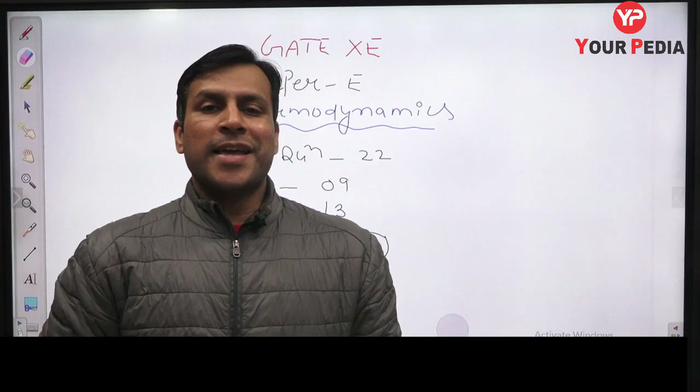So guys, as you all know, we are covering all previous year XE papers. Until now, we have covered all papers up to 2015. In today's session, I am going to cover the XE thermodynamics paper from the year 2014.

As we go to previous years, like from 2021 to 2014, the difficulty level slightly decreases because nowadays they are asking very difficult questions. So from this paper you cannot predict exactly which type of direct question you will get in the final examination 2022. The chances are very less because nowadays in XE, in the mathematics technical part, they are asking a very good level of questions, because they have increased the difficulty of the XE paper also. Why? Because lots of students nowadays are appearing for GATE XE, so you need to prepare accordingly.

So let's start. This paper is also very important because when covering all previous years, we need to get the idea of what different types of basic questions can be asked. It is not that they will never ask these types of questions - they are going to ask, but not all. Suppose 30, 40, 50% of the paper, maybe something like that, 50% maybe slightly difficult. In this paper most questions you will find on the conventional, simple line, but some more difficult questions also you need to practice.

Chaliye, let me put question number 1 in front of you. This is question number 1 for today's session from the year 2014, question number 155 in this series. In this first question he is asking you: what is entropy?

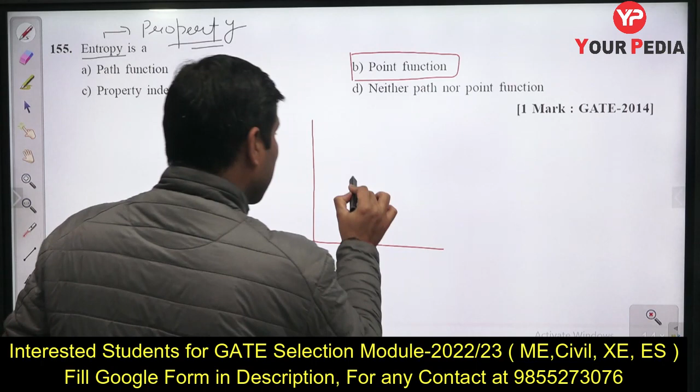So it is a kind of extensive property, but it is a property of a system, and all properties are point functions. All properties do not depend on the path. So entropy also - for any particular process, suppose this is point 1 and this is point 2 - if you want to write the entropy change, whether you go via path A or via path B, S(1 to 2) via path A equals S(1 to 2) via path B. Both are the same because entropy is a point function, not a path function.

All properties are point functions, but heat and work are not properties and they are also not point functions - they are path functions. So for this question the right answer is: point function. Chaliye, let us move to the next question.

Question number 156 in this particular series. There is a small container which has a gas at high pressure. It is placed in an evacuated space. So there is a container having some gas at high pressure, placed in the evacuated space. If the container is punctured, what is the work done?

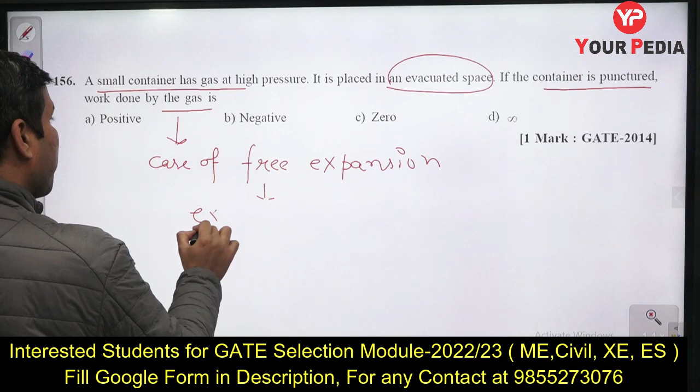Guys, it is a kind of free expansion - a case of free expansion. The gas is expanding, the gas is going to expand against vacuum. It is the expansion against vacuum. In this expansion against vacuum, the work is zero. There is no work transfer. W equal to 0.

So option C is the right answer for this question. Let us now move to question number 157.

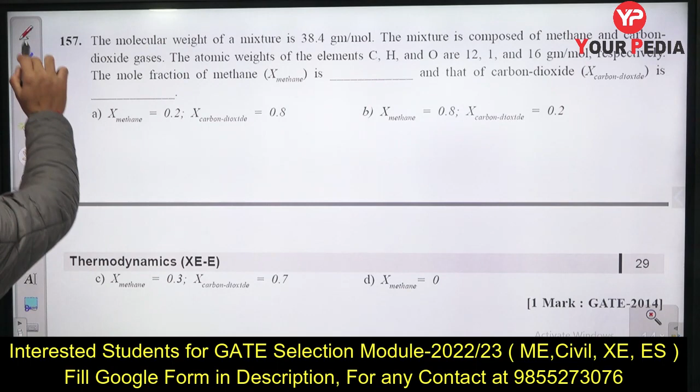A molecular weight of a mixture is 38.4 gram per mole - this is the molecular weight of the mixture. Suppose Me is this equivalent molecular weight given to us as 38.4. The mixture is composed of methane and carbon dioxide. The atomic weights of carbon, hydrogen, and oxygen are given to us respectively. He is asking the mole fraction of methane and mole fraction of carbon dioxide. Both are simple, direct questions, 1 mark each, and easily you can answer.

Guys, if you are having a mixture of two substances, here methane and carbon dioxide, a homogeneous mixture, you can write the equivalent molecular weight as 38.4. You can frame a simple equation for Me, the equivalent molecular weight.

Suppose you are having a mixture of pure substances. For any such mixture, the equivalent molecular weight equals the mole fraction, which you can write as N1 by N total, number of moles of methane divided by N total, and similarly for carbon dioxide divided by N total. So from this you can frame the equation: 38.4 equals this mole fraction expression.

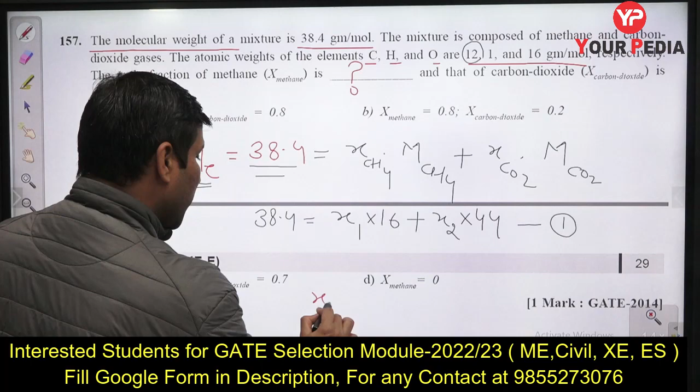We can write one more equation: mole fraction of methane plus mole fraction of carbon dioxide equals 1, because they constitute the entire mixture. So N1 by N total plus N2 by N total, taking LCM gives N1 plus N2 equals N total. So mole fraction of 1 plus mole fraction of 2 equals 1. This is another equation. Two unknowns, two equations, and you can easily solve using this.

From this, if I replace x1 equal to 1 minus x2, and put this value here: 38.4 equals (1 minus x2) into 16 plus 44 x2. Let me further solve this: 38.4 equals 16 minus 16 x2 plus 44 x2. So you will get 38.4 minus 16 equals 28 x2, subtracting this from that.

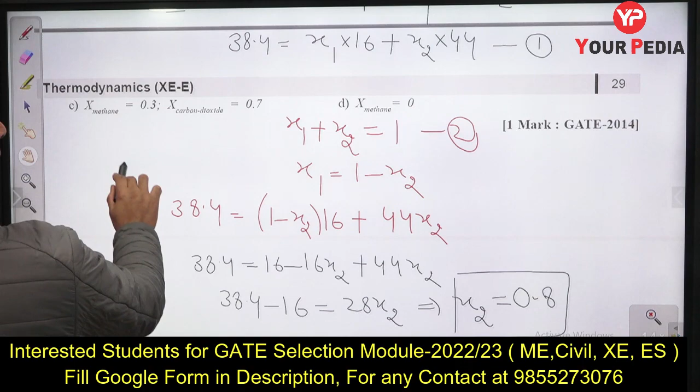And from this you will easily get x2, the mole fraction for carbon dioxide. So 38.4 minus 16 divided by 28, you will get 0.8. So 0.8 is the mole fraction for carbon dioxide, and for methane you will get 0.2, because methane is 1 minus this. So x1 equals 1 minus x2, which comes out to 0.2.

So option A will be our right answer. For methane the mole fraction is 0.2, and for carbon dioxide the mole fraction is 0.8. You can check your answer. Let me check mine too, so we can match all the answers. Yes, 0.2, 0.8 - option A is the right answer for this question.

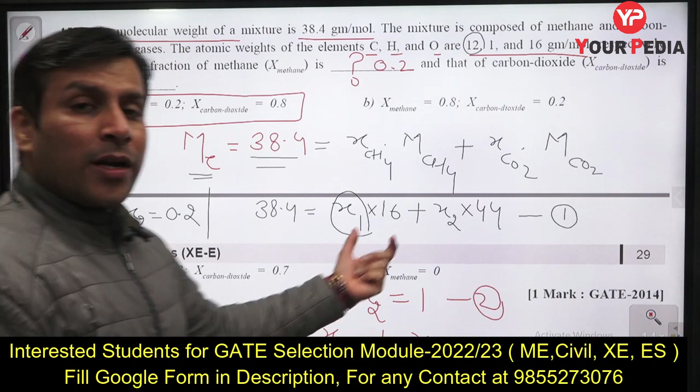I hope this is very clear to all of you. It's a very simple question - if you are clear with this formula, then direct simplification is all you need, and you will get the answer. Let us now move to the next question, guys, question number 158 in this series.

A system undergoes a change from state 1 to 2. During the process, the change in internal energy occurs - this is state 1, this is state 2, and during that state change, the change in internal energy is delta U, from 1 to 2.

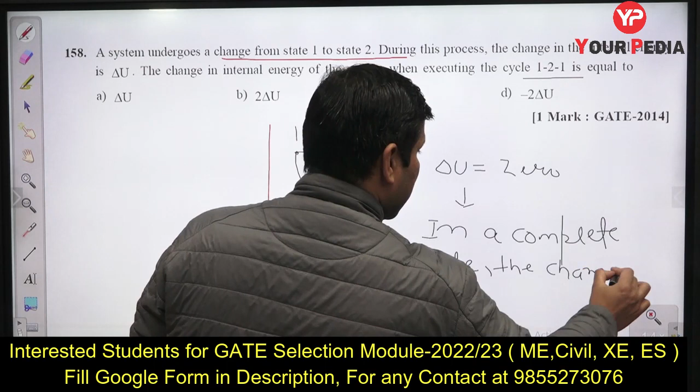So the change in internal energy of the system when executing the cycle 1-2-1 - if you execute a complete cycle like this, the change in internal energy will become 0. Why? Because in a complete cycle, the change in any property is 0 - whether it is internal energy, entropy, temperature, pressure, volume, any property is 0. So we can write option C as the right answer.

Option C will be our right answer for this question. Let us now move to the next question, guys, question number 159.

Which of the following plots represent a line joining two states with the same dew point temperature on the psychrometric chart? On the psychrometric chart, horizontal lines represent the dew point temperature.

Suppose this is state 1 and this is state 2. If you extend a horizontal line here so that it meets this point, that temperature gives us the DPT, dew point temperature. This is our saturation line where relative humidity is 100%. So for any different states on the same horizontal line, they represent the same DPT, because on a horizontal line DPT is constant. These are all DPT lines.

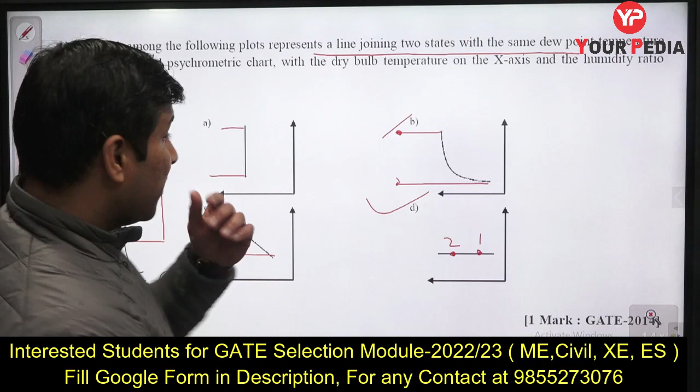So the option that matches is option D, because there if you take two states, you will have the same DPT at both points. But in other options, if you extend the lines, you get different DPT values, because only a horizontal line gives the same DPT. So only D is the right answer.

Let us now move to the next question, question number 160.

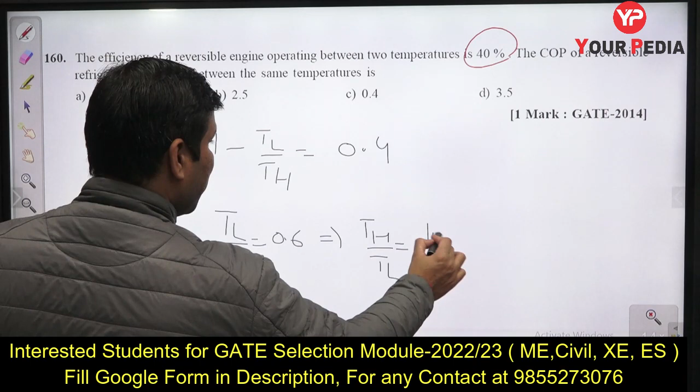The efficiency of a reversible engine operating between two temperatures is given. A reversible engine's efficiency is 1 minus T lower by T higher. This is given as 40%, meaning 0.4. So T lower by T higher equals 0.6, and from this T higher by T lower equals 1 by 0.6, which is 10 by 6.

Now he is asking for the COP of the reversible refrigerator. COP of a reversible refrigerator is T lower by T higher minus T lower, which can be written as 1 by (T higher by T lower minus 1). Putting the value, 1 by (10 by 6 minus 1), solving this gives 6 by 4, which equals 1.5.

So option A, 1.5, is the right answer for this question. A very simple, direct question, and I hope this is clear to all of you.

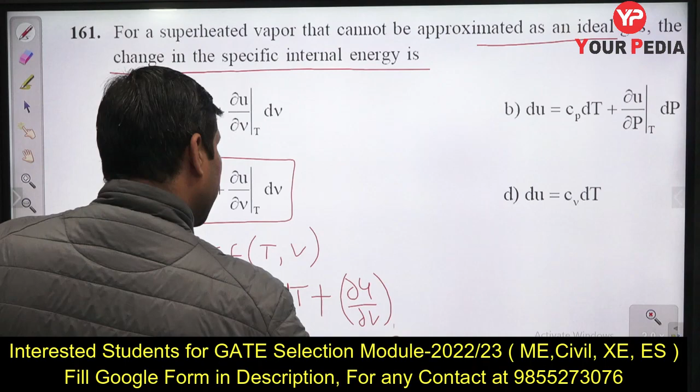Directly, you need to remember option C is the right answer. But if you want to derive it, write internal energy as a function of temperature and volume. Since this is a property, du equals (del u by del T at constant v) dT plus (del u by del v at constant T) dv.

This first quantity is nothing but Cv. So du can be written as Cv dT plus (del u by del v at constant T) dv. This is how you write the change in internal energy for a real gas.

This particular quantity, del u by del v at constant T, will be zero for an ideal gas, because for an ideal gas the change in internal energy is independent of volume.

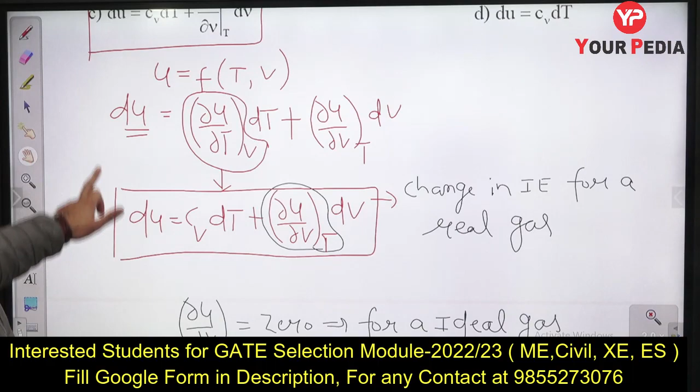Okay, so if it is independent of volume, this term will be 0 for an ideal gas, but for a real gas this term is going to exist. So you can write, for a real gas, du equal to CVdT plus del u by del v at constant T dV. You need to directly remember this relationship.

Similarly, you can remember enthalpy also, change in enthalpy for a real gas. Change in enthalpy for an ideal gas is CPdT, change in internal energy for an ideal gas is CVdT, but this is how you write change in internal energy for a real gas. Same with enthalpy you can write. Earlier also we discussed all these things.

Let us now move to the next question. The minimum and maximum volumes in an air standard Otto cycle.

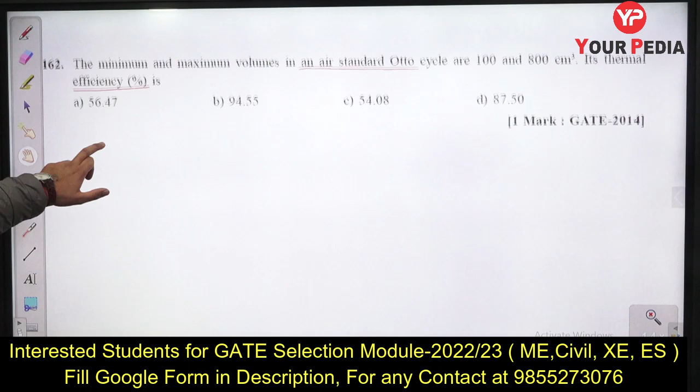There is an air standard Otto cycle, the minimum and maximum volume given are 100 and 800 centimeter cube. So V minimum means this is clearance volume Vc, given to us as 100. V maximum means this is the total volume, given to us as 800.

So compression ratio is nothing but total volume divided by clearance volume. So 800 divided by 100, this is the compression ratio. 8 is the compression ratio for the given case. So indirectly he is giving you the compression ratio.

He is asking you the thermal efficiency of the Otto cycle. This is nothing but 1 minus 1 by r to the power gamma minus 1. So here, 1 minus 1 by 8 to the power gamma, gamma is 1.4 for air, because he is asking air standard Otto cycle. So for air, gamma equal to 1.4.

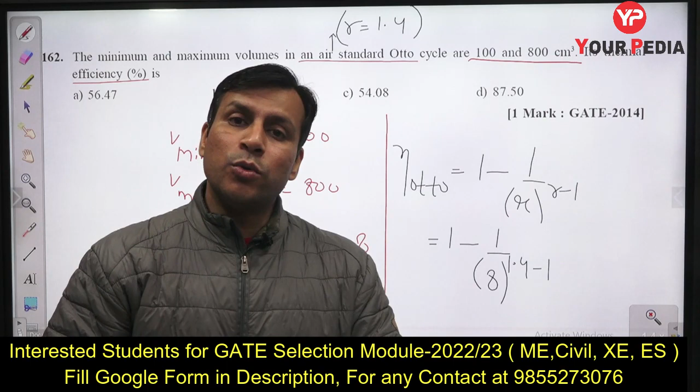For monoatomic gases, gamma equal to 1.67. For exhaust gases, gamma equal to 1.33. So if you solve this, guys, you will directly get the efficiency. Let me solve it for you: 8 power 0.4, 1 divided by this, 1 minus this, you will get efficiency 56.47.

Option A is the right answer for this. You will get efficiency 0.5647 or 56.47%. Both simple, direct question. I hope this is very clear to all of you.

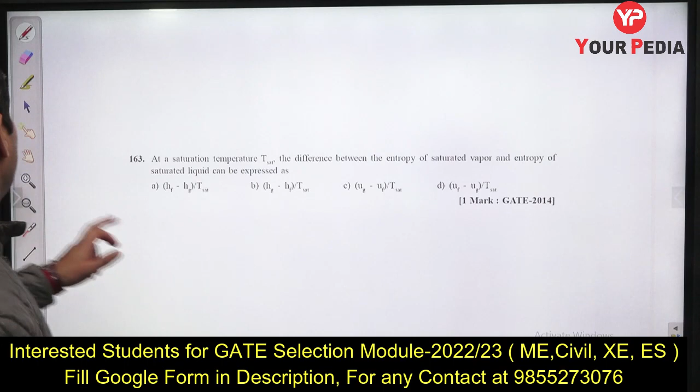Let us now move to next question, guys. Question number 163. I am solving these very directly. If you want to practice, you can pause the video before I answer. If you are unable to answer, you can watch the detailed solution part.

So next question: at the standard saturation temperature, T saturation, the difference in entropy between saturated vapor and liquid is this. How can you express the change in entropy between the vapor? Suppose this is T saturation, this is entropy of the saturated vapor Sg, this is entropy of the saturated liquid Sf, and he is asking how we can write Sg minus Sf.

Sg minus Sf is nothing but Hfg by T saturation. You know ds equal to dq by T. So for a phase change process, ds equal to Sg minus Sf and heat transfer equal to Hg minus Hf, where T is the temperature of the phase change, which is T saturation. So you can write Sg minus Sf as Hg minus Hf by T saturation.

So option B is the right answer: Hg minus Hf divided by T saturation. So don't rush and write it wrong as Hf minus Hg by T saturation, that will be incorrect. He is asking the entropy difference between saturated vapor and saturated liquid, which is Hg minus Hf divided by T saturation.

Let us now move to the next question. Okay, now we are moving to the 2 marks question. This is the first 2 marks question in front of us.

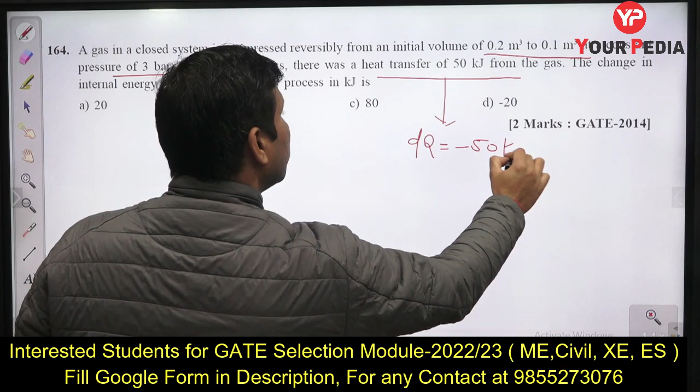Using first law of thermodynamics for a closed system, we can write here dq equal to du plus dw.

So what is dq guys? Dq here it is minus 50, du we want to find out, dw is also minus negative. Why? Because here you are compressing the gas, means the work is done on the system at a constant pressure.

You are compressing a gas at a constant pressure. So pressure is constant. So in a closed system, if pressure is constant, you can write work equal to P into V2 minus V1, final volume minus initial volume. Automatically you will get the negative work. If you write it as V final which is 0.1, V initial is 0.2, you will get negative work. But already when I placed here negative sign, so inside you can write it as initial volume minus final volume, something like this.

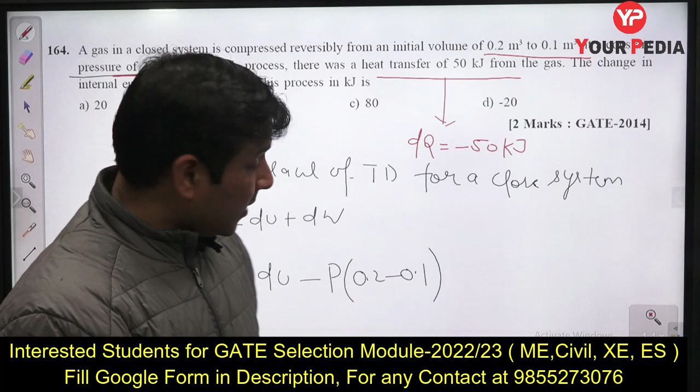But if you are interested to write it as dW only, then you can write it as something like this, but then inside you need to write the final volume minus initial volume, then automatically you will get this in negative. Okay, so let us solve this.

So du minus the pressure is 3 bar, so you can write it as 300 kilopascal, this is 0.1. So solving this, you will get minus 50 equal to du minus 30 kilojoule. Solving this further, you will get du equal to minus 50 plus 30, you will get minus 20 kilojoule. So internal energy is going to decrease by 20 kilojoule.

Internal energy is going to decrease by minus 20 kilojoule, means option D is the right answer for this question. Let us now move to next question, question number 165.

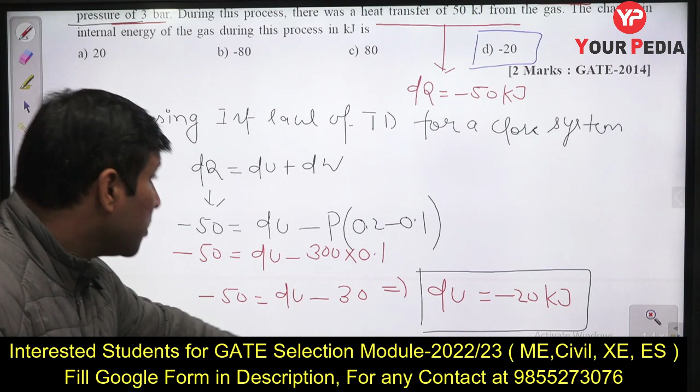165 in this series, in a closed rigid vessel, the air is initially at a pressure of this. This is the initial pressure, guys. This is the initial volume and this is the initial temperature. A stirrer is supplied this much of work.

So work transfer in this process, W equal to minus 100 kilojoule, because work is done on the system. So gas inside this chamber, this is our system, guys. The gas inside this is our system. Work is done on the system, that's why I am writing it as minus.

While 20 kilojoule of heat is lost, again this is heat going out, so the heat transfer is equal to minus 20 kilojoule. You can write it as Q only. So heat transfer Q equal to minus 20 kilojoule. He's asking you the final temperature.

So guys, again very similar kind of question. dq equal to du plus dw. How much is the heat transfer? Minus 20. How much is this? We want to find out. What is the work transfer? This is minus 100. Okay, so du will be 80 kilojoule.

This is a closed container, guys, closed rigid container. So for an ideal gas in a closed rigid container, du, change in internal energy for an ideal gas, because here he mentioned air is inside the chamber in this container, and we can consider air as an ideal gas.

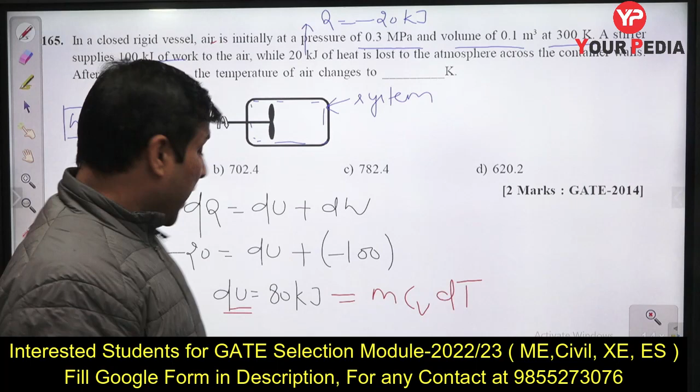So for air as an ideal gas, we can write du equal to mCv dt. dt we want to find out, initial temperature we know, Cv also we know for the air, which is 0.718. Mass we don't know, and mass you are going to get from this inputs. So PV, ideal gas equation, PV equal to mRT.

So the mass inside this equal to initial pressure which is 0.3 megapascal. So 0.3 into 10 to the power 3 into volume. Volume is this 0.1, which is fixed. 0.1 divided by R. So for air, R is 0.287 into the initial temperature, which is 300.

So you will get mass inside this chamber very easily, after simplification. So let me write it here: 0.3 multiply by 1000 multiply by 0.1 divided by 0.287 divided by 300. So you will get mass 0.3484 kg.

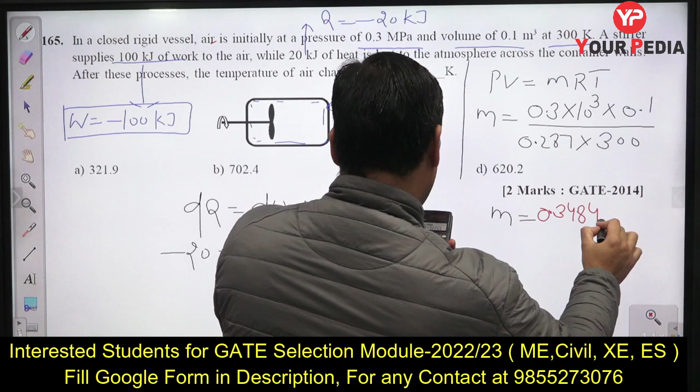34843 kg, okay, and this mass if you put it here, this is the mass. 0.34843, Cv is 0.718, dt is T final.

We want to find out T initial is 300. Easily after solving you will get this final temperature. So let me solve it for you. Multiply by 0.718 and this term 80 you can divide by this, and then T final will be plus 300. So you will get this final temperature close to 619.77 Kelvin, which is very close to 620 Kelvin.

So you can go with this answer, option D as the right answer. 620.2, this is the final temperature.

Let us see, he is asking in Kelvin. Let me write it as Kelvin only, because this is the temperature you are going to get in Kelvin only. So this is the temperature in Kelvin, because this 300 is in Kelvin, so this final temperature will also be in Kelvin. So this is the answer, close to T final is close to 620 Kelvin, not in degree Celsius.

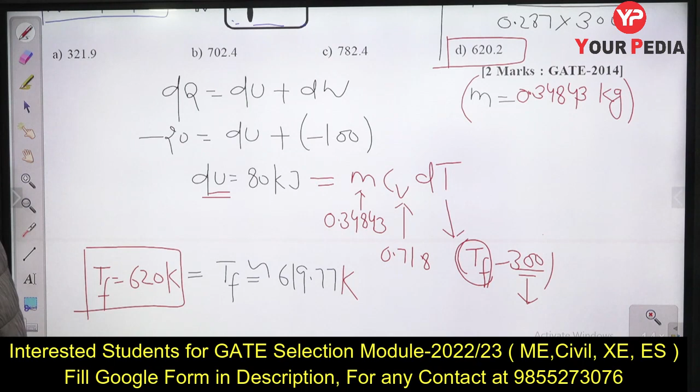So T final temperature is 620 Kelvin, not degree Celsius. He asked you in degree Kelvin only. But if you want to find out in degree Celsius, then you need to subtract 273 from this, then you will get the answer in degree Celsius also. So option D, this is the right answer for this question. I hope this is very clear to all. Please check and you can match your answer also.

Let us now move to question number 166 in this series.

There is a reservoir, reversible heat engine E, which is operating between three thermal energy reservoirs, with the temperatures as shown in the figure: reservoir 1, reservoir 2, and reservoir T3. From reservoir 1 and reservoir 2 it is taking some heat, and to reservoir 3 it is rejecting. It is given to us Q1 equal to Q2, and he is asking you the thermal efficiency of the engine.

Thermal efficiency of the engine. So you know thermal efficiency of any heat engine is nothing but W net divided by heat supplied. So you can write it as Q net divided by heat supplied, or as 1 minus Q rejection by heat supplied. So what is the rejection in this case?

In this case, what is the rejection? Rejection is Q3. And what is heat supplied? Heat supplied is Q1 plus Q2. But as it is given to us, both Q1 and Q2 are same, so I can write this efficiency as 1 minus Q3 by 2Q1, because Q1 is equal to Q2.

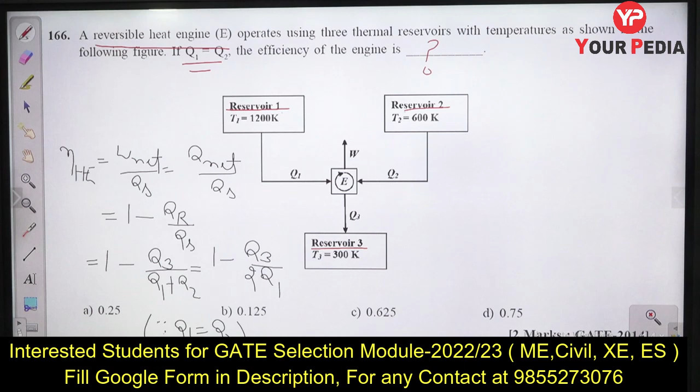Okay, so now you need to find out this ratio Q3 by Q1. If you are able to find out this ratio, you will easily be able to solve this problem. And from where will you get this? Because it is very clearly given to us that it is a reversible heat engine, so for any reversible heat engine, cyclic integration of dQ by T is equal to 0. Using Clausius inequality, if you apply cyclic integration of the thermodynamic temperature scale, Q by T, that is equal to 0 for any reversible cycle.

So here, because this is heat addition, you can write it as Q1 by T1, this is positive, Q2 by T2, this is also positive, minus Q3 by T3, this is negative. Why? Because heat added to the system is positive, heat rejected by the system is negative. So further you can write it as Q1 into 1 by T1 plus 1 by T2, since Q1 equal to Q2, these two are same, so I can easily take Q1 common.

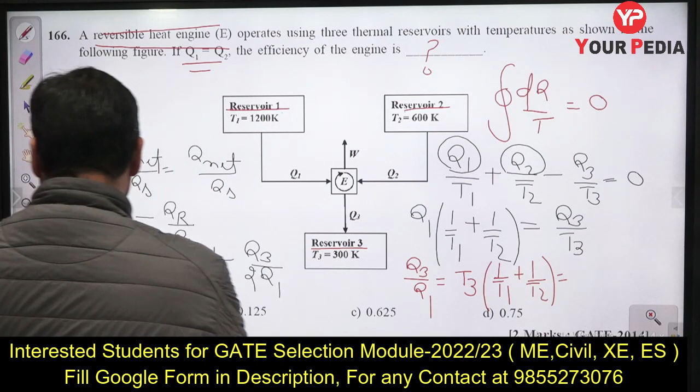This is equal to Q3 by T3. Solving this further, you will get Q3 by Q1 equal to T3 into 1 by T1 plus 1 by T2. Let me put in all the values so that we get this answer. T3 is 300 Kelvin, into 1 by T1 is 1200 Kelvin plus T2 is 600 Kelvin. Okay, let me simplify this.

Q3 by Q1, this is equal to 300. From this I can take 600 common, so inside you get 1 by 2 plus 1, so this is 300 by 600 into 3 by 2. If you further solve, you get 3 by 4. So this term, Q3 by Q1, you are getting 3 by 4.

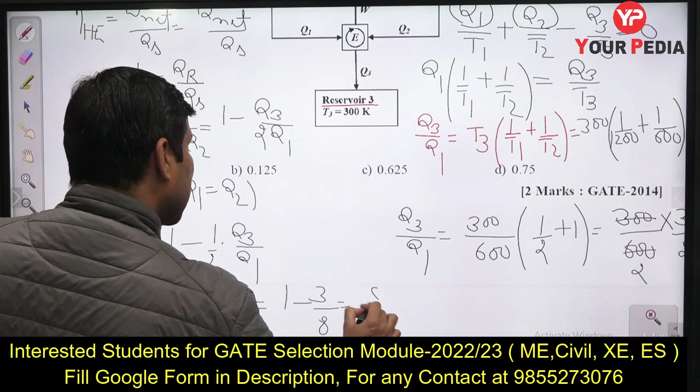So now if you will put this value here, efficiency of heat engine equals 1 minus 1 by 2 into Q3 by Q1, and we got the answer for Q3 by Q1, which is nothing but 3 by 4. So this is 1 minus 3 by 8, so the efficiency is 5 by 8, which is nothing but what?

If you divide this, you will get 0.625. So 62.5% or 0.625 is the answer for this question. So if you will solve, you will get option C as the right answer.

Okay, it's a very simple question, a little calculation needed, but the concept is very direct and simple. So he asked you the efficiency of a heat engine. We know the basic expression for the efficiency of a heat engine. So in this case we used the efficiency of a heat engine formula, and solving this we got the answer for the efficiency. I hope this is very clear to all of you guys.

Let us now move to the next question, guys. Question number 167.

There is a metal block of mass 25 kg at 300 Kelvin. So we have a metal block - this metal block is 25 kg at 300 Kelvin.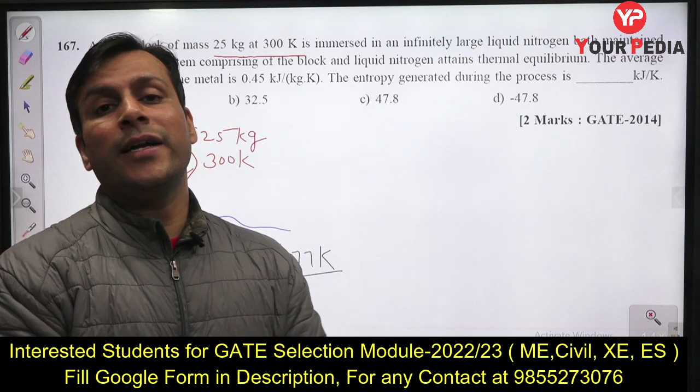This is immersed in an infinitely large nitrogen bath. So there is an infinitely large nitrogen bath, at a temperature of 77 Kelvin, because it is an infinitely large reservoir, so it is at a constant temperature. Reservoir temperature is not going to change because it has infinite thermal capacity. So its temperature is not going to change even if you immerse this metal block in it, which is at a high temperature.

So the system comprising of block and nitrogen attains thermal equilibrium. When you immerse this block in the bath, they are going to attain some final temperature. The average specific heat of the metal is given. He is asking you the entropy generation - what is the entropy generation in this case? Very typical question - earlier we solved these type of questions too.

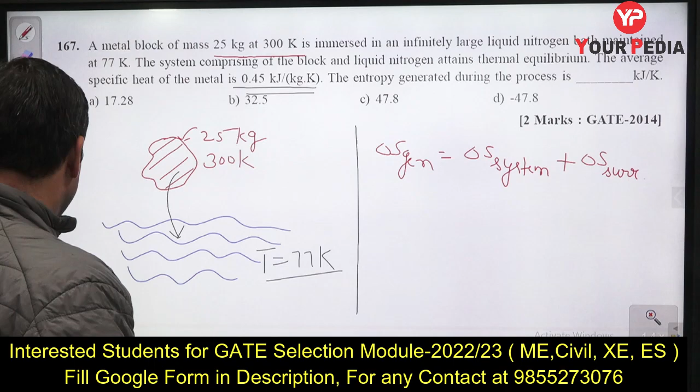So guys, entropy generation is nothing but entropy change of system plus surrounding. What is mentioned is that the system comprises of block and liquid nitrogen - both are being called the system. So in that case, if they are only interacting via heat, then the entropy change of the surrounding will be zero. So entropy change of system means entropy change for the block plus entropy change for the reservoir, meaning this tank.

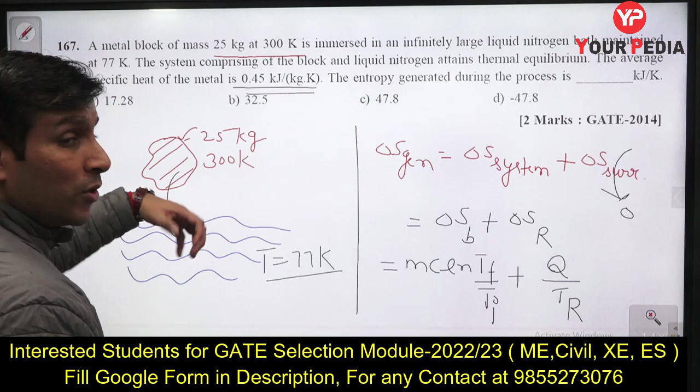So for the block, the entropy change will be MC ln(T final/T initial). For the reservoir, it will be heat transfer, heat added, divided by the temperature of the reservoir. Because you are adding heat here, so its entropy is also going to increase. For a thermal energy reservoir acting as a sink, entropy is heat addition into the sink divided by sink temperature. For a source, the supplier of energy, entropy is going to decrease, but here you are supplying energy, so entropy is going to increase - Q by T, Q will be positive here.

Okay, so if you will solve this: MC ln. What is the mass of this block? It's given to us as 25. The specific heat C is given to us as 0.45 kilojoule per kg.

And ln of T final - what is the final temperature, guys? For the metal block, final temperature will be 77, because this is a thermal energy reservoir, so finally this metal block is going to attain this temperature only. So this is T final. What is the initial temperature? It is 300.

Plus, what is heat transfer, guys? Heat transfer will be MC dt. So I can write heat transfer Q equal to MC dt. How much heat do you get? 25 into specific heat 0.45, into change in temperature which is 300 minus 77, you will get heat added. So let me solve it here: 25 multiply by 0.45 multiply by 300 minus 77, you will get 2508.75 kilojoule. This is the amount of heat you are adding.

So if you take this value, 2508.75 divided by temperature of the reservoir, which is 77. Let me solve it for you so you get the exact answer: ln of 77 divided by 300, multiply by 0.45 multiply by 25.

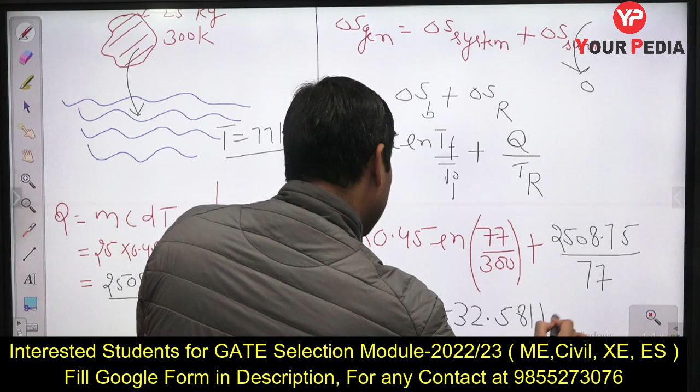So from this you can write 2508.75 divided by 77, you will get 32.58116. If I subtract minus 15.299 from this, you will get entropy generation in this process: 17.282 kilojoule per Kelvin. Entropy generation will always be positive for any irreversible process. For this also we are getting the entropy change positive, which is 17.282.

So let us now match the options. Yes, option A is exactly matching, so this is the right answer for this question. This is a very simple direct question, and guys you need to be very much familiar, very comfortable solving these type of questions, because these are very direct simple questions. Okay, I hope this is very clear.

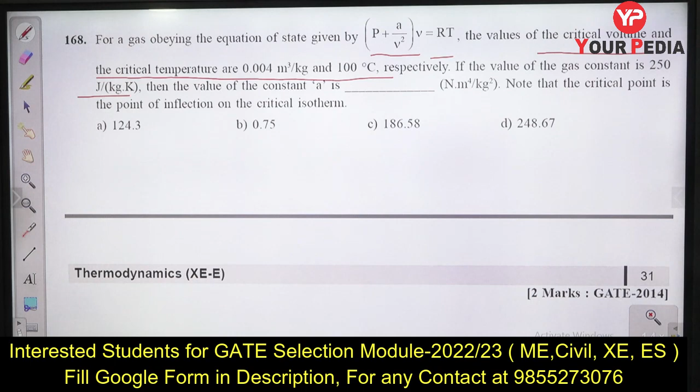Let us now move to next question, question number 168. So for a gas obeying the equation P plus A by V square into V equal to RT, the values of the critical volume and the critical temperature are given. The value of the gas constant is also given to us, 250 joule per kg Kelvin. Then he is asking you the value of the constant A.

Guys, you know these kind of equations we use for the real gas equation. For ideal gas we use PV equal to RT, this is the ideal gas equation. So where V is the specific volume, I am writing this V as the specific volume. And you know guys, this kind of equation, P plus A by V square into V minus B equal to RT, this is known as van der Waals equation, van der Waals equation for real gas.

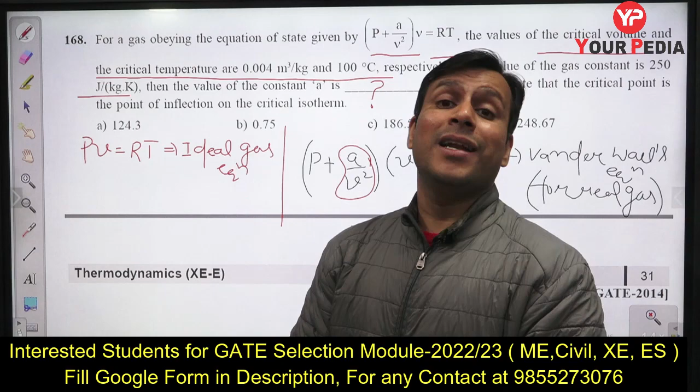In this equation, this term A is introduced to take into consideration the force of attraction between the gas molecules, and this term B is introduced to take into consideration the volume of the gas molecules, because for ideal gas generally we neglect the intermolecular force of attraction between the gas molecules. We consider there is no such intermolecular force of attraction between the molecules of an ideal gas.

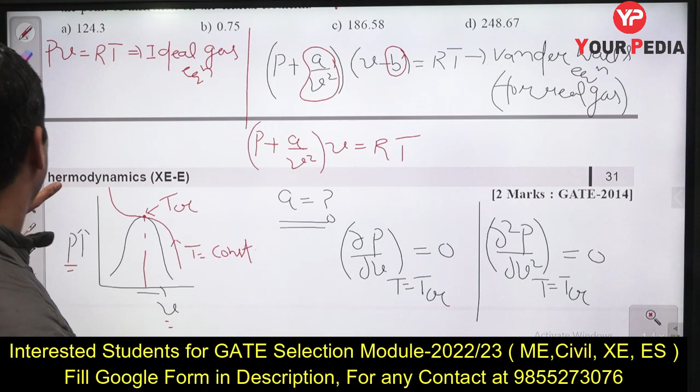So let me solve it for you guys. If I simplify this equation: PV plus A by V equal to RT. Further simplification, you will get PV equal to RT minus A by V, or solving this you will get P equal to RT by V minus A by V square.

Now what you need to do is simply differentiate this. You need to differentiate it, so yes, you can write it as del P by del V into RT.

This is actually V to the power -1. So -1 into V to the power -2, you will get minus RT by V square.

Here also, because this is minus, if you take it upside, you will get -2. So minus, if you take it here, you will get 2A, -2 minus 1 gives -3. So this will come out. Very simple thing I am carrying out here.

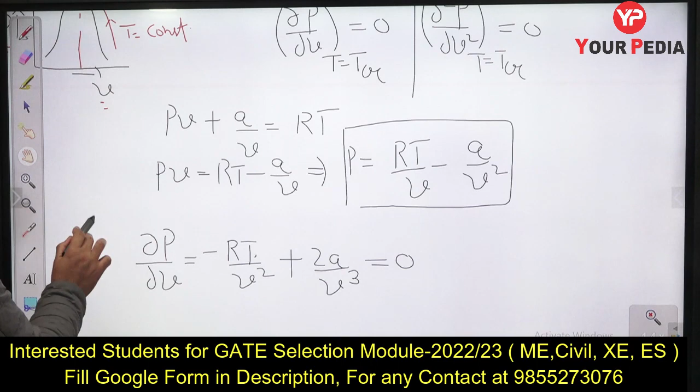So this is equal to 0. This is the condition: del P by del V equal to 0. At what, guys? If I write this temperature as T critical and this volume as V critical. So here I am not writing this as 0, let me first simplify this.

So if I write this as 0, this is minus R T critical by V critical square plus 2A by V critical cube. Let me simplify this so we will get the value of A. So 2A by V critical cube is equal to R T critical by V critical square.

Simplifying this term, this will cancel out, and you will get A equal to RT critical into V critical divided by 2. This is the final formula, the final answer we are going to get.

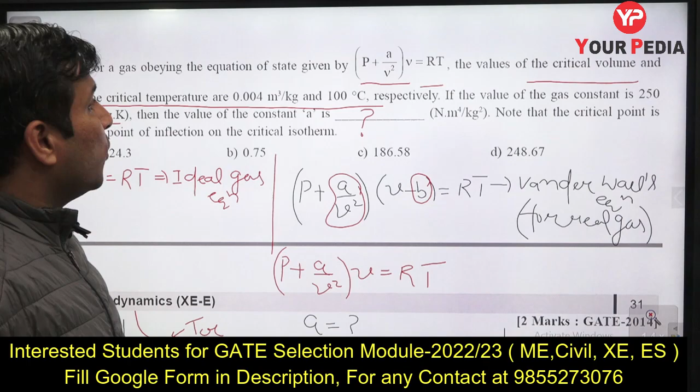Now you need to put all the given values. He has given you the T critical, which is 100 degrees Celsius, but you need to put this in Kelvin. The critical volume is 0.004, and R is also given to us, 250 joule per kg Kelvin.

We need to use all SI units, guys, because he asked for A in Newton meter to the power 4 by kg square. You can match the unit very easily. Okay, let me put it here, all the values.

So R is given to us as 250. The temperature is 100 plus 273, it is 373. The V critical is 0.004 divided by 2. Let me check the critical volume value, 0.004, yes, exact.

Let me solve so we will get the final answer for the value A. 250 multiplied by 373 multiplied by 0.004 divided by 2, you will get A equal to 186.5. This is a constant value guys we are going to get, all units will be in SI units.

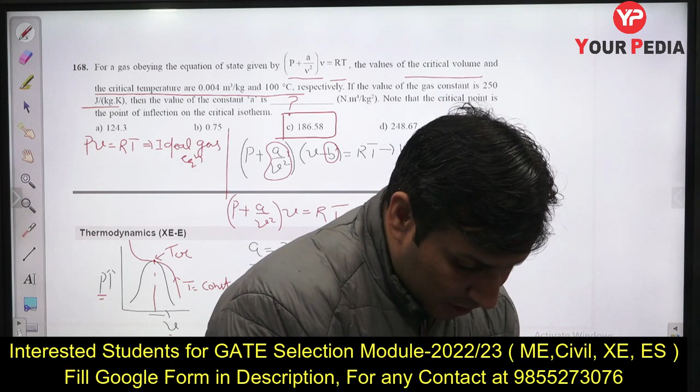186.5, so option C is the right answer for this question. Let me also match my answer. So this is the answer we are getting for question number 168, option C, 186.5. The exact answer we are getting for this question.

Okay guys, let us now move to the next question, question number 169. So this is the next question in front of you. Let me zoom it for you.

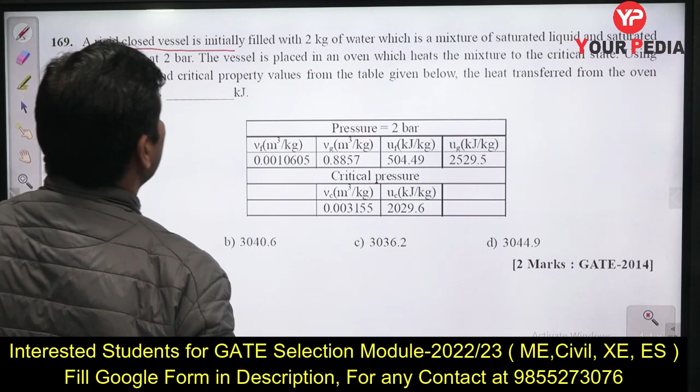So this is the question: a rigid closed vessel is initially filled with 2 kg of water, which is actually a mixture of saturated liquid and saturated vapor. So there is water in a particular container which is a mixture of saturated liquid and vapor, meaning the condition is in the wet region. We are having a mixture, not pure water or pure gas. This is the condition, guys, at a pressure of 2 bar, the vessel is placed in an oven.

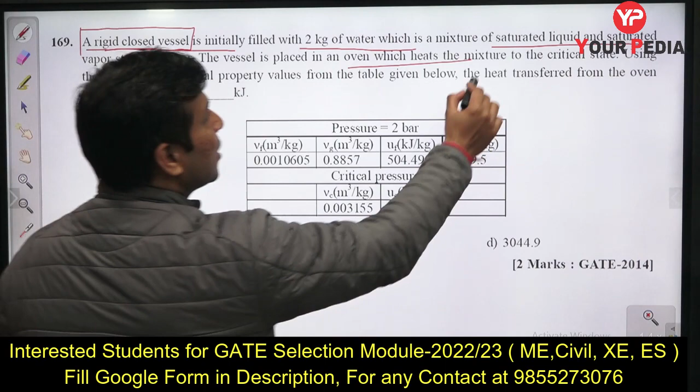Guys, these things are very important. Closed rigid vessel, so there is a rigid vessel. We are having saturated liquid and saturated vapor, meaning we are in the wet region. This is the second important point for us. The vessel is placed in the oven which heats the mixture to the critical state. So the initial state we don't know, but the final state we know. The final state is the critical state, guys, that idea also we are getting from this question.

Using the saturated and critical property values from the table given below, how much is the heat supplied? How much is the heat transferred in this process, guys? The question asks you for the heat transferred in this process from state 1 to 2.

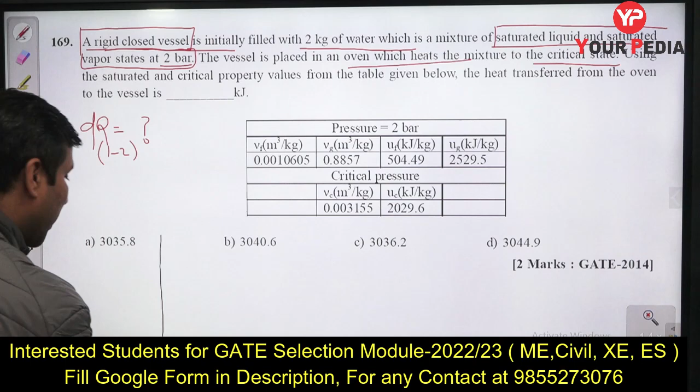So guys, if I will show this process on a PV diagram, so here if I will take pressure versus volume diagram, something like this. Suppose this is pressure and you are having here volume, and on the PV diagram if you will draw the plot, you will have a curve. This is the initial condition guys, somewhere here in the wet region, and this is the final condition, the critical point, and the process is going from 1 to 2.

Why at constant volume? Because we are having a rigid container, so in a rigid container volume is going to remain constant. So that idea also we are having, so volume is constant. Okay, so he is asking you in this case the heat transfer.

As we know guys, this is heat transfer in a closed container, a rigid closed container. So heat transfer is nothing but equal to change in internal energy. Heat transfer equal to change in internal energy. So guys, if you want to find out this heat transfer, simply you need to find out the change

in internal energy, means U2 minus U1, or you can write it as UC minus U1, because this 2 point is the critical point. So this is already known to us, UC. From the table given, UC we already know is 2029.6, minus U1. Okay, so if you are able to find out U1, you will get your answer.

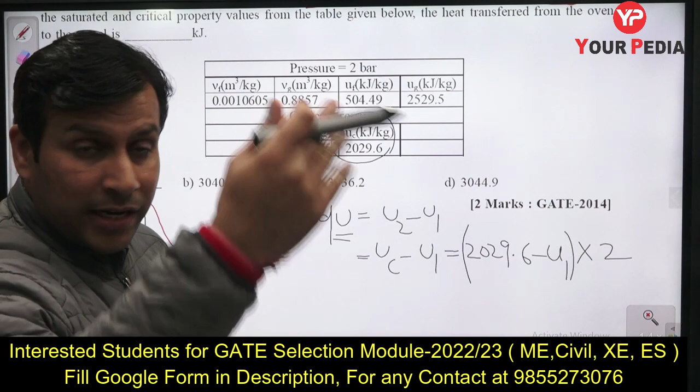Okay, these are actually small terms because he is asking you heat transfer in kilojoule. From this actually initially we are going to get this in kilojoule per kg. So let me write it somewhere here. U2 minus U1 multiply by mass. So mass is 2 kg. Mass is also going to remain constant in a closed container. So multiply by 2, you will get the heat transfer.

So guys, from where will you get U1? U1 is in the wet region, and U1 is nothing but at this pressure, at this condition. So this is equal to UF plus X into UG minus UF. Okay, so if you are able to find out X, you will get your answer.

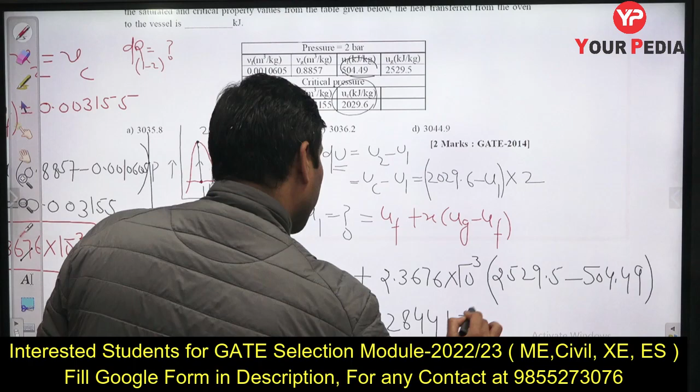2529.5 minus 504.49 plus 504.49. So if you simplify this, guys, U1 you will get 509.2844 kilojoule per kg. And if you put this value here, 2029.6 minus U1 multiplied by 2, you will get the heat transfer, exact value 3040.63 kilojoule. This is the amount of heat transfer you get, because mass is already given to us, 2 kg. So UC minus U1, in specific terms kilojoule per kg, minus U1 again in kilojoule per kg, multiplied by mass 2 kg which is fixed, you will get the heat transfer, because in a closed container the heat transfer equals change in internal energy.

3040.6 is the right answer for this question. So please check and you can match your answer. Option B is the right answer for this question, guys.

Let us now move to next question, question number 170.

The equation of state for a certain gas: V equals RT by P minus C1 by T square plus C2, where C1 is given as 50,000 Kelvin square meter cube per kg, and C2 is given as 0.8. The relationship del H by del P at constant T, that equals V minus T del V by del T at constant P, is known for the gas.

The inversion temperature for this condition - what is the inversion temperature? So he is asking you the inversion temperature, and the condition is also given to us. So the question is very simple and direct, guys.

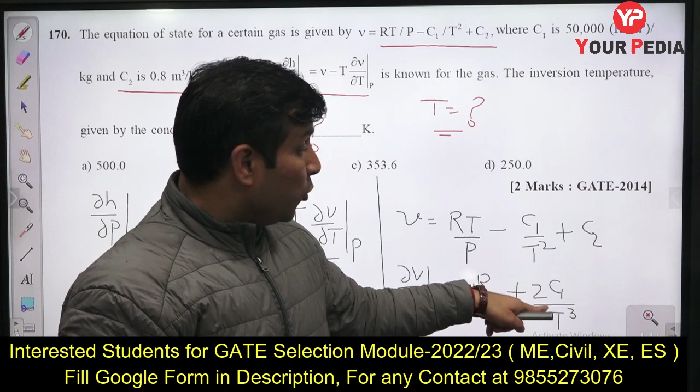This is 0. So let me put this value here: 0 equals V. V is nothing but small v. So V is equal to RT by P minus RT by P minus C1 by T square plus C2, minus T into the entire term - T into del V by del T at constant P, which equals RT by P plus 2C1 by T square.

So I am writing this term: T multiplied by del V by del T at constant P, so then you get this term. Let me put this term here: minus, this becomes RT by P, this also becomes minus 2C1 by T square. So if you simplify this further, guys, this will cancel out, and here you get: if you take it to this side, you get 3C1 by T square, that equals C2.

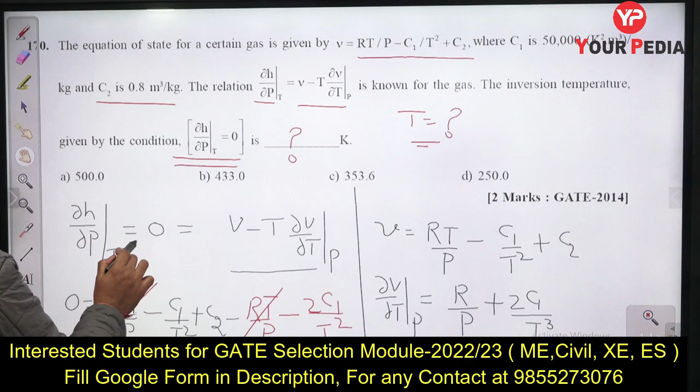So with further simplification, you get T square equals 3C1 by C2. Let me put this here: 3 into C1. What is C1, guys? What is C1 given to us? C1 is given as 50,000, C2 is 0.8. So 50,000 divided by 0.8, this is actually T square. So let me solve this so we get the final temperature value.

So 3 multiplied by 50,000 divided by 0.8, you get this 187,500, and if you take the square root of this, you get 433.0127. Obviously the answer will come out in Kelvin. So let's see which option is matching. 433, option B is the right answer.

Let me also match my answer, guys. This is question number 170, and yes, this is the right answer. Option B is the right answer for this question. So very simple, direct question, guys. Only you need to carry out some kind of mathematical analysis. So V is given to us, he has given you this condition. For this condition, he asked you the inversion temperature. What is inversion temperature? Let me tell you that - this is where your inversion curve.

If you plot different isenthalpic curves on the temperature versus pressure diagram, you will have an inversion point, where the slope is going to change. Initially you will have a positive slope in the left region, and in the right region of that inversion curve you will have negative slope, and in the left region you will have positive slope.

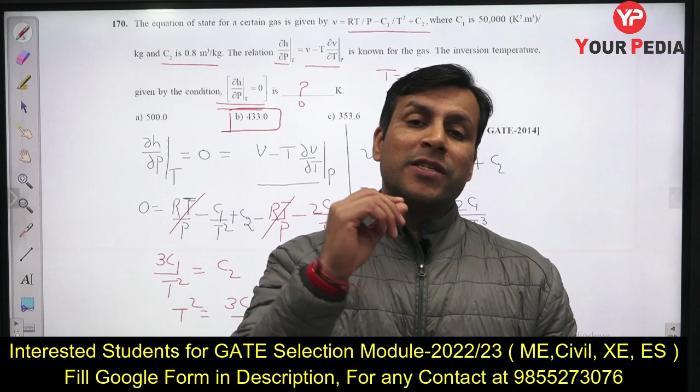So these are some basic details. I hope this question is very much clear to you. Solving this easily, you will get temperature 433.012, meaning option B is the right answer for this question.

Okay guys, so this is the next question in front of us, question number 171. Let me zoom it for you guys. The maximum pressure and temperature in an air standard diesel cycle are given. So maximum pressure and maximum temperature are given to us. If the minimum pressure and minimum temperature are given respectively, then what is the cutoff ratio?

So let me first draw the diesel cycle on the PV diagram. On the PV diagram you can draw the diesel cycle something like this: constant pressure heat addition, constant volume rejection, and something like this. So 1 to 2 is isentropic compression process, 2 to 3 constant pressure heat addition, 3 to 4 isentropic expansion, and 4 to 1 is constant volume heat rejection. So this is heat addition at constant pressure, this is heat rejection at constant volume, this is isentropic compression, this is isentropic expansion. So guys, let me write here the data which is given to us.

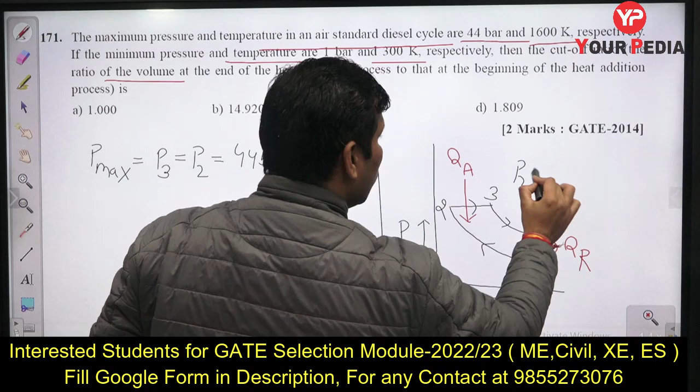P max equal to P3 equal to P2 equal to 44 bar. Why? Because 2 to 3 is a constant pressure process, so pressure P2 equal to P3. P3 is the point, guys, where you get the point after the heat addition, constant pressure heat addition. So this point 3 represents the maximum temperature, maximum pressure condition, because at the end of the heat addition you get maximum temperature, maximum pressure.

So this is the data given to us, and other than this, T3 equal to T max is also given to us, which is 1600 Kelvin. Now he has also given you the minimum temperature, T minimum equal to T1, which is 300 Kelvin, and P minimum equal to P1, which is equal to 1 bar.

Okay, now let's see what he's asking you. He's asking you the cutoff ratio. What is the cutoff ratio, guys? Cutoff ratio is the volume at the end of the heat addition process divided by the volume before the heat addition process, V3 by V2. This ratio is known as cutoff ratio, and this is nothing but equal to T3 by T2.

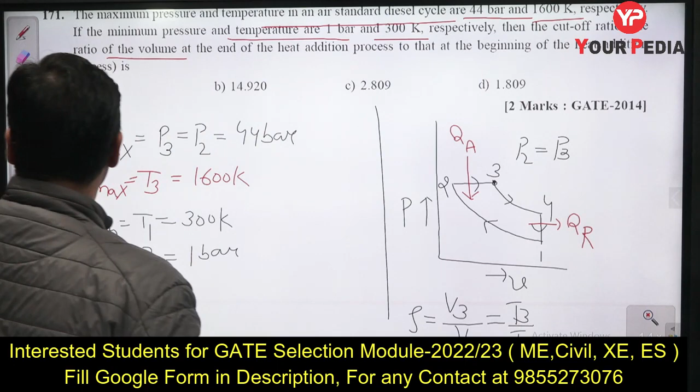How can you say that? Because 2 to 3 is a constant pressure process, pressure constant, and for any constant pressure process, V by T equal to constant. So we can write V2 by T2 equal to V3 by T3, or from this we can write V3 by V2 equal to T3 by T2.

So guys, simply, if you want to find out this cutoff ratio, the cutoff ratio is nothing but V3 by V2, and this is nothing but T3 by T2. T3 is already given to us, 1600 Kelvin. So if you are able to find out T2, you will get your answer.

For the process 1 to 2, isentropic compression process, you can write T2 by T1 equal to P2 by P1 to the power gamma minus 1 by gamma. So T2 equal to T1, T1 is equal to 300. What is P2, guys? P2 equal to P3, which is 44 bar, so you can write 44. What is P1? P1 is the minimum pressure, which is 1 bar, power 1.4 minus 1 divided by 1.4.

Solving this, you will get your T2. Let me solve it for you guys. So 44 power 0.4 divided by 1.4, multiply by 300, you will get 884.46 Kelvin. The answer you are going to get in Kelvin only.

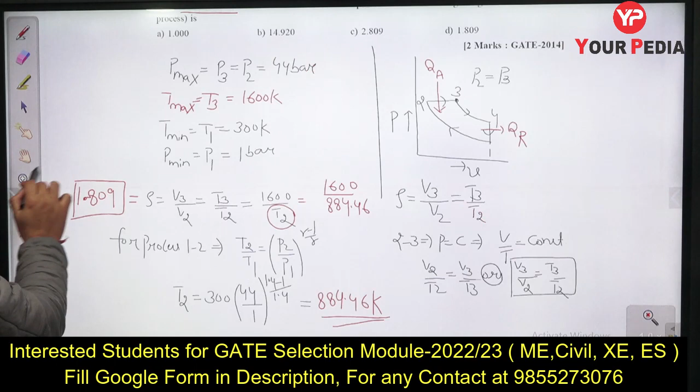Okay guys, so I am getting 1.809, so exactly D is matching with this, so I will go with option D as the right answer. Very simple direct question, guys. Some little bit calculation is there, but there is no such difficult concept. I hope this is very much clear to all.

Let us now move to, guys, next question, question number 172. The thermal efficiency of an air standard Brayton cycle is 35%. So this is the thermal efficiency, guys.

Efficiency of simple Brayton, thermal efficiency of simple Brayton, this is nothing but 1 minus 1 by Rp power gamma minus 1 by gamma. This is the formula, guys, I hope this is very clear to all of you. So this is given to us as 0.35.

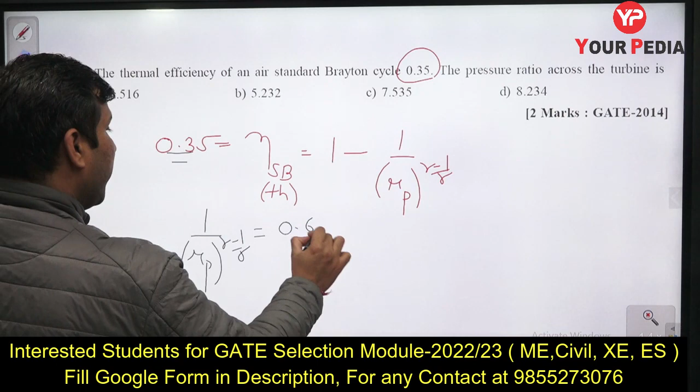So you can write 1 by Rp power gamma minus 1 by gamma equal to 0.65. So from this you can write Rp power gamma minus 1 by gamma equal to 1 by 0.65. Solving this easily you will get Rp. So Rp equal to 1 by 0.65, power gamma means 1.4 because air standard Brayton cycle, so gamma is 1.4, divided by gamma minus 1, you will get 0.4.

Here I am reversing the power, guys, because if you take both sides to this power, both sides, if you take power gamma by gamma minus 1, this side power will be cancelled out and this side you will get gamma by gamma minus 1. Let me solve it for you guys. So 1 divided by 0.65, and this power you need to take 1.4 divided by 0.4, so I'm getting 4.516. Exact answer I'm getting, guys, 4.5165. So this is the pressure ratio for this question.

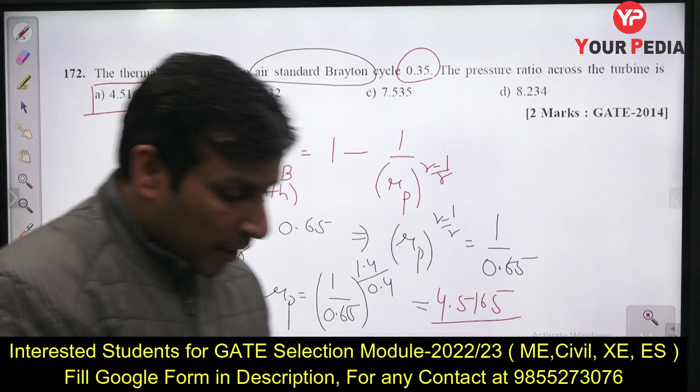Very simple direct question, halwa question hai, and I think all of you are getting the answer for this question. 4.516, option A is the right answer for this question. Let us now move to next question, guys.

Question number 173. Steam is isentropically expanded in a turbine from 80 bar to 7 bar. So this is the initial pressure in the steam turbine, this is the final pressure. At the inlet of the turbine, enthalpy and entropy are given. At the inlet, okay, and at the exit, 7 bar, he has given you, because 7 bar exit condition, exit of the turbine, will lie in the wet region.

So in the wet region he has given you the specific property of the saturated liquid and saturated vapor. Now he is asking you the enthalpy at the exit of the turbine. What is the enthalpy at the exit of the turbine? Very simple, we need to find H2, and you know H2 will lie in the wet region. So this is equal to HF plus X, Hg minus HF.

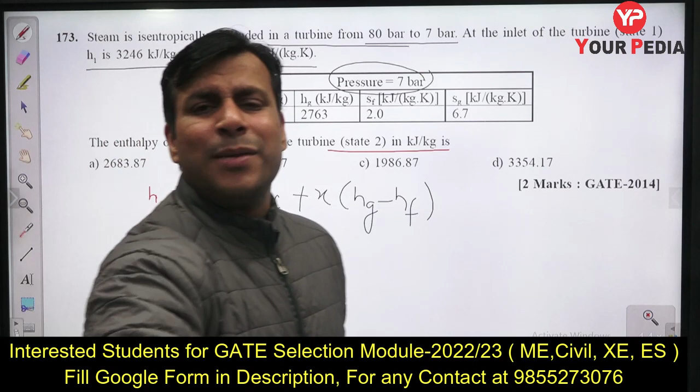So all things are given to us. HF, Hg, all are given to us. So if you know X, the dryness fraction at the exit, you will get the answer. Again, very simple direct question, guys. So from where are you going to get X? You know expansion in the turbine, isentropic expansion in the turbine is what? Expansion in the turbine is isentropic.

Isentropic. Isentropic का मतलब क्या होता है बच्चों? Entropy at the entry of the turbine S1 is equal to S2.

So what is S1? S1 is given to us, 6.52. What is S2? S2 I can write as Sf plus X into Sg minus Sf. In the wet region, I can write entropy something like this.

So let me put all the values so that we will get the X value. So Sf is what, guys? This 2 plus X, we want to find Sg which is 6.7 minus Sf is 2. Solving this, you will get the X value. इसको solve करोगे बच्चों, X आ जाएगा आपके पास.

Dryness fraction or the quality of the steam at the exit of the turbine. So 6.7 minus 2 is 4.7, and this 4.52, if you divide it by this, you will get the quality close to 96%, 0.9617.

So this is the quality I am getting. Okay, and if you put this value here, guys, इस value को अगर मैं यहाँ put कर दूँ, so Hf is 697 plus 0.9617 into Hg is 2763 minus 697.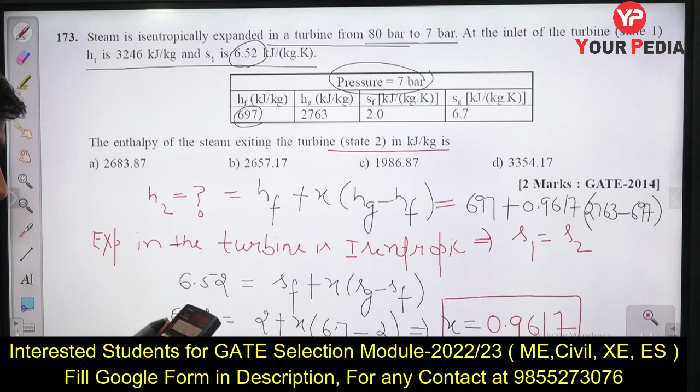So very easily, very simply, you will get enthalpy at the exit. So 2763 minus 697 plus 697, I am getting 2683. So this is the enthalpy, guys, you are going to get at the exit of the turbine. Let me write it here, 2683.87 kilojoule per kg. This is the enthalpy I am getting.

So option A is the right answer for this question. Option A is the right answer, guys. Very simple direct question. Let us now move to, guys, next question, question number 174.

A thin insulating membrane separates two tanks. So there are two tanks, guys. This is tank 1, this is tank 2. Tank 1 is filled with nitrogen. These are number of moles of the nitrogen, 0.8 moles, 2 bar, 350 Kelvin. These are the number of moles of carbon dioxide, 1 bar, 300 Kelvin.

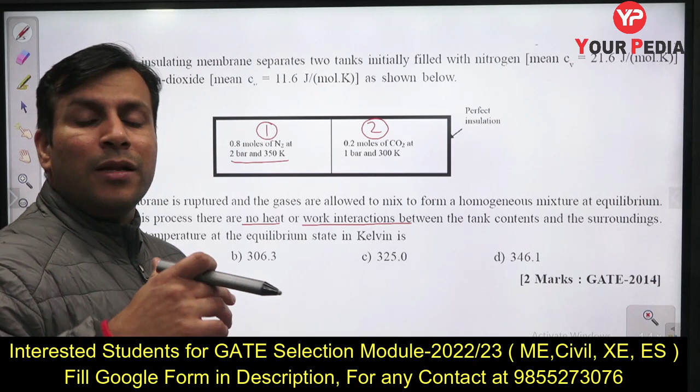So what he has mentioned, guys, is that the membrane is ruptured and gases are allowed to mix. So it is a case of mixing. Mixing का case आपको दे रहा है, and you finally get a homogeneous mixture at equilibrium. During this process, there is no heat transfer, there is no work transfer. Generally we consider mixing as a very fast process, and in mixing there is no such heat transfer. Generally we consider mixing as an adiabatic process.

So it is given also there is no heat transfer, there is no work transfer. So this is actually a closed container. So if you write it here, dQ equal to dU plus dW. So dQ equal to 0 equal to dU plus dW. So dU is also 0, guys. From this, very simply you can write dU equal to 0, because there is no heat transfer, there is no work transfer, so internal energy is also going to remain constant, or what you can say, initial internal energy Ui equal to U final.

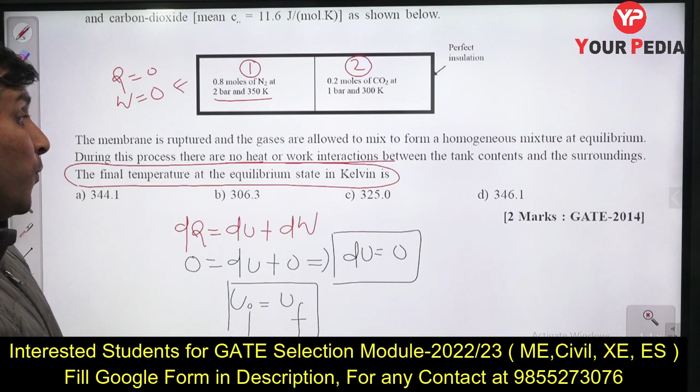Okay, so let's see what he's asking you in this question, guys. The tank, between the tank contents, the final temperature, guys, they are asking you the final temperature. So very simply you will get the final temperature using this equation only, U initial equal to U final. Okay, so let me tell you how to get the final temperature.

What is U initial, guys? U initial is nothing but the initial internal energy for this and this, because initially this is actually a separate system, this is actually a separate part. This entire is our system, this entire container is our system. So internal energy of nitrogen individually first, internal energy of this, these are the initial internal energy. Final internal energy will be the internal energy of the mixture. Okay, so you can write it here.

U initial is what? This is the internal energy for the nitrogen, plus internal energy for the carbon dioxide initial. Okay, so that is equal to initial energy of nitrogen plus CO2 mixture final. Okay, so this you can write it as, इसको आप ऐसे भी लिख सकते हो.

What is internal energy, guys? This we can write, because at a particular point, suppose we consider some kind of reference state as 0 degree Celsius. So considering 0 degree Celsius as the reference state, or 0 Kelvin as the reference state, we can define the internal energy. How? As mc dT or mcv dT. Okay, so here number of moles are given, so it is better to write this equation as ncv dT, where n are the number of moles and cv is the molar specific heat at constant volume and T is the temperature.

dT means the final temperature, T, the temperature which you are having at this time. Initial temperature is the reference state, 0 Kelvin.

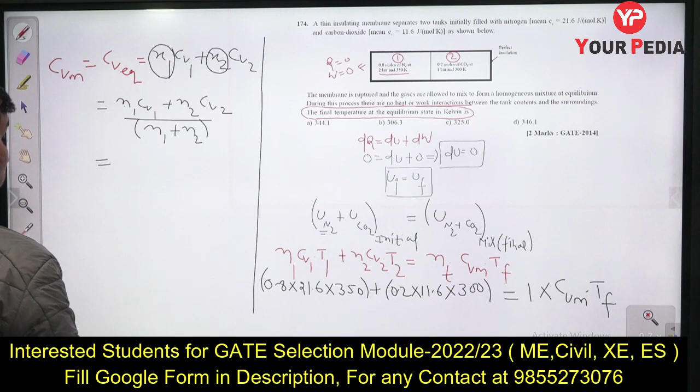So if you put all the values here, guys, total number of moles are 1. How many moles for nitrogen? 0.8. So 0.8 divided by 1, means 0.8 itself is the mole fraction for nitrogen. So 0.8 multiplied by CV1, which is 21.6, plus x2 again 0.2 divided by 1, you get 0.2 only, multiplied by 11.6, you will get CV of the mixture.

Equivalent CV is required, otherwise you will not get the exact answer. So 0.2 multiplied by 11.6 plus 0.8 multiplied by 21.6, you get the answer 19.6 joule per mole Kelvin.

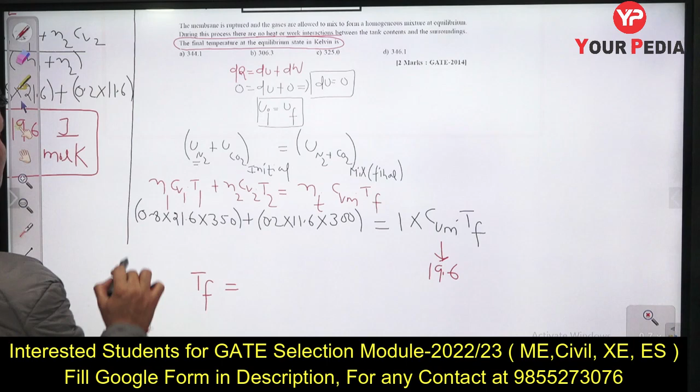So guys, if you put this value, 19.6, you will get the final temperature very easily and quickly. Let me solve it for you. 0.8 multiplied by 21.6, multiplied by 350, this value you will get is 6048.

Let me solve this also: 0.2 multiplied by 11.6 multiplied by 300, you get 696. So let me add 6048 and 696, divide by 19.6, so you will get the final temperature, 344.0816, or you can write this final temperature as 344.1 Kelvin. So this is the final temperature, guys.

I hope this answer is very much clear and all of you are getting this answer. Final temperature, 344, is the final temperature for this question. So option A is the right answer, guys. This is the right answer for this question.

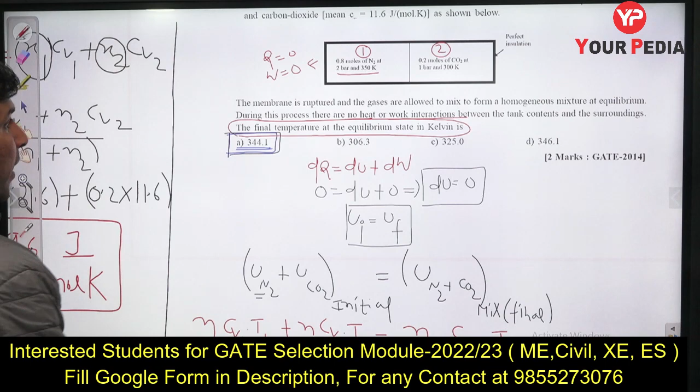Okay, let us now move to the next question, guys. Question number 175.

Question number 175. So there are two moist air streams, MAS1 and MAS2. These are the two moist air streams. They are mixing adiabatically, meaning there is no heat transfer from the outside. They are only mixing, only exchanging heat; there is no heat transfer from the outside. So this is 1, this is 2, and this I am writing as 3.

So here the enthalpy, specific volume, and flow rate are given. What is it asking? It is asking for the exit enthalpy. What is the exit enthalpy?

Very simple, guys, direct question. This easily you will be able to solve from the energy balance. What is energy balance for these type of question?

You can write the energy balance as M1H1 plus M2H2 equal to M3H3, or you can write it with mass flow rates: M1 dot H1 plus M2 dot H2 equal to M3 dot H3. H1, H2 are given. M1, M2, M3 you will easily get, because M3 is nothing but M1 plus M2 from the mass balance.

So how to find out M1, guys? You know density equals mass per unit volume, so mass flow rate equals density into volume flow rate, or mass flow rate equals volume flow rate divided by specific volume. So simply you need to divide volume flow rate by specific volume to get the mass flow rate.

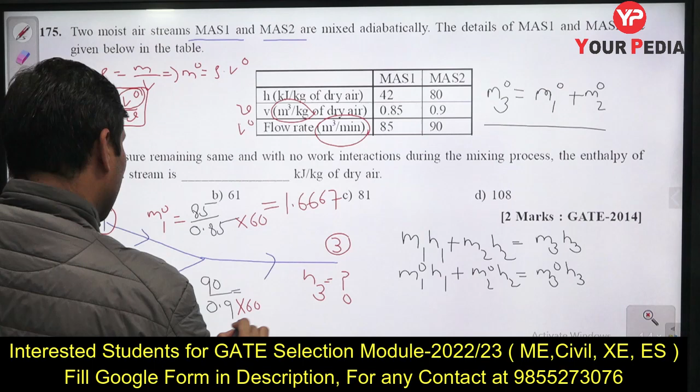85 divided by 0.85, and then if you divide it by 60, you will get 1.6667. So this also you will get 1.6667.

So M1 we know, M2 we know, guys, and H1, H2 are also given. If you put all the values: M1, which is 1.6667, into H1 which is 42, plus M2, which is 1.6667, multiplied by H2, 80, this is equal to 2 into 1.6667 into H3. Because M3 is nothing but M1 plus M2, both are same, so I'm just multiplying by 2 into this.

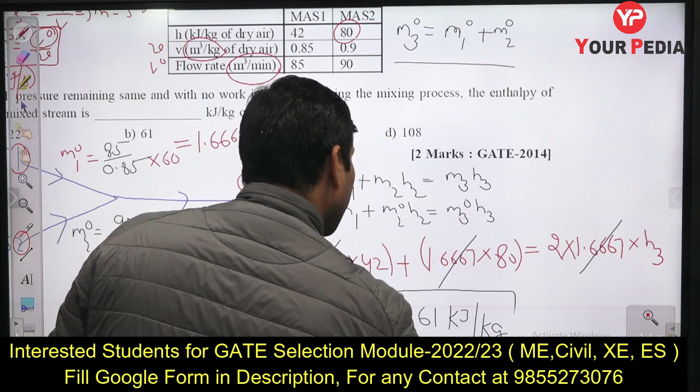If you simplify this, guys, divide by this term, this will cancel out. So 42 plus 80, you will get 122. Divide by 2, 122 divided by 2, you will get H3 equal to 61 kilojoule per kg. Very simple direct question, guys, and I hope this is very clear to all.

Option B is the right answer, guys, for this question. This is the answer for this question. Option B is the right answer for this question.

Let me place again this question in front of you, guys. Question number 175. I think this is the second last question, and now finally we reached our last question, question number 176. For today's session it is the last, but again we will meet and solve some more questions from the year 2013 and 12.

Consider the steady state flow of air through an insulated nozzle. So there is a nozzle, guys. Generally we draw a nozzle something like this. On the expense of pressure energy, we increase the kinetic energy. So this is a kind of nozzle. This is entry, this is exit.

It is mentioned that there is no heat transfer. It is an adiabatic insulated nozzle. There is no heat transfer. In the nozzle there is no work transfer also.

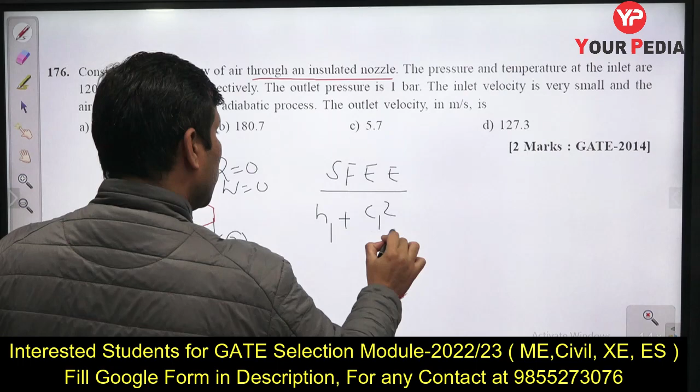So if you write the steady flow energy equation for the nozzle, you can write it as H1 plus C1 square by 2 plus gZ1 plus Q equals H2 plus C2 square by 2 plus gZ2 plus WCV. In this case, there is no work transfer and no heat transfer also. We can neglect the changes in potential energy. So we can write C2 square by 2.

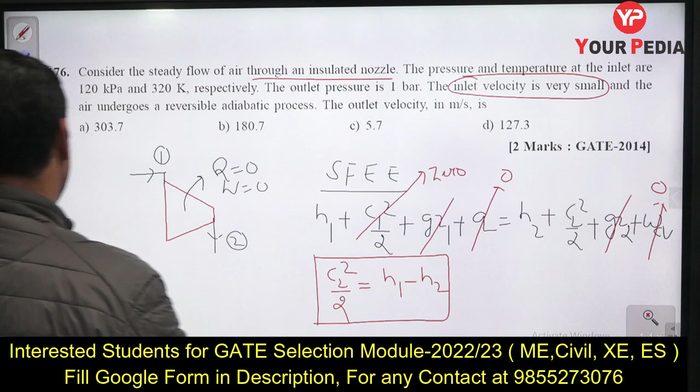Also, let me check what is mentioned about the inlet velocity. Inlet velocity is mentioned as very small, so we can assume this is 0. Similarly, this is 0, this is 0, this is 0. But this term we are not taking as 0, because both are comparable, both are almost equal, since the change in potential energy is less. So C2 square by 2 can be written as H1 minus H2. In SI units, joule per kg, no conversion is required. H1 is the inlet enthalpy, H2 is the exit enthalpy.

Let me check what data is given. It is mentioned: consider a steady flow of air, so air we can treat as an ideal gas. Then we can write H1 minus H2 as Cp(T1 minus T2). This is the inlet temperature, inlet pressure, and exit pressure given. Exit temperature is not given, but it is mentioned that the expansion in the nozzle is reversible adiabatic, so we can write T2 by T1 equal to (P2 by P1) to the power (gamma minus 1 by gamma).

So T2 equal to T1 multiplied by (P2/P1) to the power (gamma-1)/gamma. T1 is 320, P2 is 1 bar which is 100 kilopascal, P1 is 120 kilopascal. Power gamma minus 1 means 0.4 divided by 1.4. Solving this, you will get the T2 value, the temperature at the exit, using this simple relationship.

So 100 divided by 120, taking the power of 0.4 divided by 1.4, multiplied by 320, you will get the exit temperature equal to 303.757 Kelvin. This is T2, slightly lower than the initial temperature.

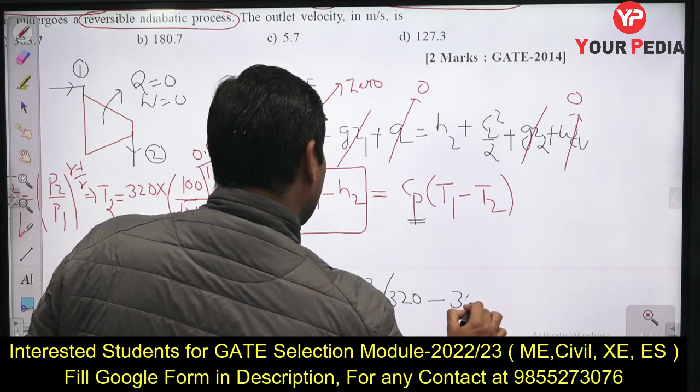Cp for air is 1.005 kilojoule per kg, but you need to use all SI units, because these are specific energies. All terms in the steady flow energy equation represent specific energies per unit mass. So C2 square by 2 equals Cp for air, that is 1.005 into 10 to the power 3, into T1 minus T2, where T1 is 320 and T2 is 303.75. By solving this, you will easily get the exit velocity C2.

So let me solve: 320 minus 303.75, multiplied by 1.005, multiplied by 1000, multiplied by 2, and then take the square root of this entire expression. You will get C2, the exit velocity, equal to 180.7276 meter per second. This is the exit velocity we are getting in this question.

Let me also match my answer, and I hope this is right. Yes, 180.7, this is the right answer for this question. So option B is the right answer.

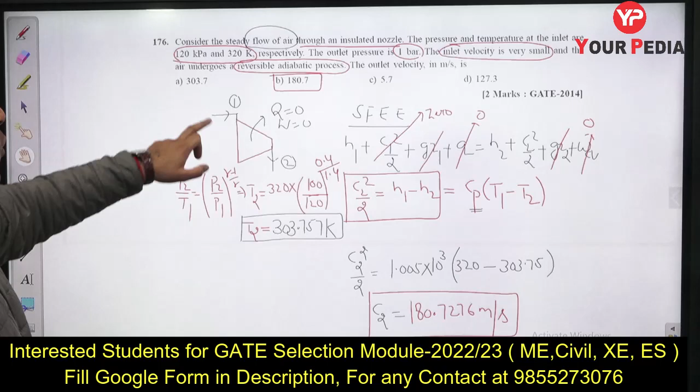For these kinds of questions, you need to focus on the key points. He mentioned steady flow in the nozzle, so the steady flow equation can be used. He mentioned reversible adiabatic expansion, so we can use that equation. He mentioned an insulated nozzle, so there is no heat transfer and no work transfer. But in actual cases, you can get problems where heat transfer is given, so don't always assume the process is reversible adiabatic. Accordingly, you need to use the data given. In this case, since there was no heat or work transfer, we used all this data and solved it very easily, getting 180.7.

I hope all these 22 questions which we discussed in today's session are very clear to you. Once again we will meet and solve the paper from 2013 as well.